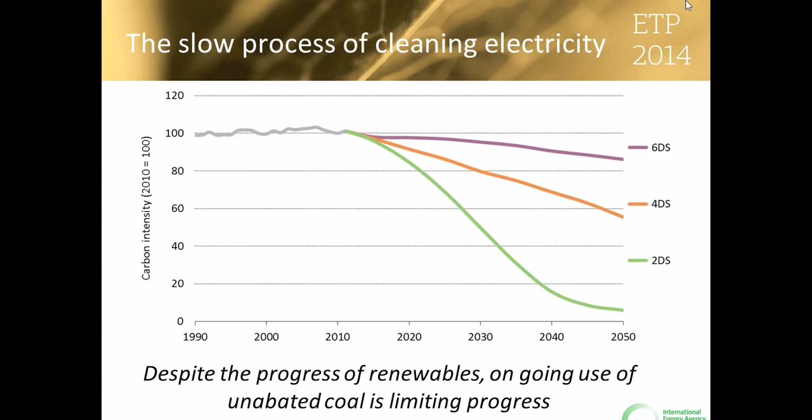So this introduces very different challenges. For emerging countries with high growth, we see that significant investments are needed, but therefore a significant opportunity to develop their system in a way that is sustainable. Contrast that with OECD member countries, we see low growth but aging infrastructure. So still more investment needed, but in a context of lower revenues for utilities. So this introduces some significant challenges. But what is clear across all regional electricity systems and energy systems is that the share of electricity is growing in importance.

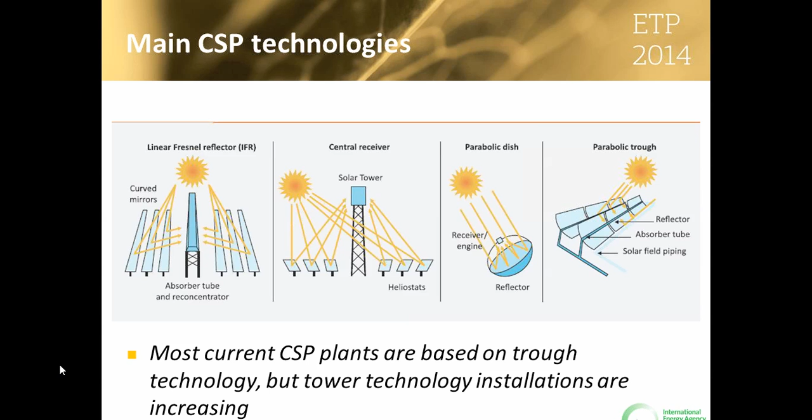Now you also have these solar thermal electricity technologies, the CSP technologies, which offer a different way of making electricity in places where you have very good direct normal irradiance, very good sunshine and clear skies, and then you have a bunch of technologies that allow you to generate electricity after you have collected the heat. And this is very important because it gives an opportunity to store the heat before turning it into electricity.

And this is a form of storage that is very good because first, it's very effective, there are very few losses, and second, it allows to increase the capacity factor of the conventional part of the plant. So at the end of the day, it does not increase the cost of electricity, but it can even reduce it a little bit. Most importantly, it increases its value in allowing to generate electricity on demand, and especially during peak times. In most countries, peak times can be in the afternoon, but they are more important after sunset.

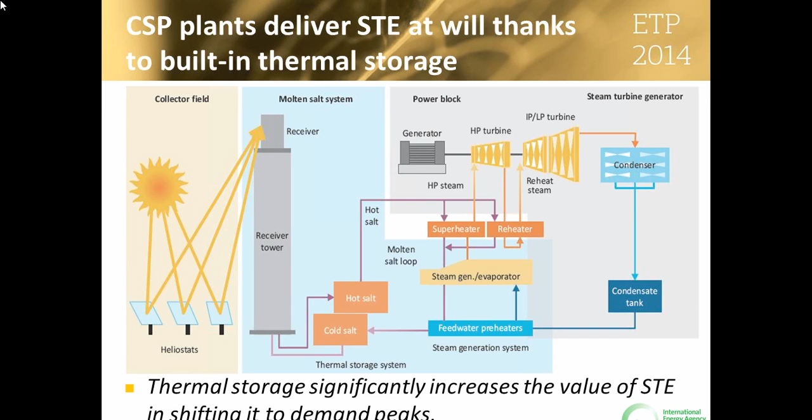And when you have a big population of PV systems in a country, then the net demand peaks after sunset, and therefore solar thermal electricity from CSP plants will be able to compensate and inject more electricity in the system at those times when the sun is not here.

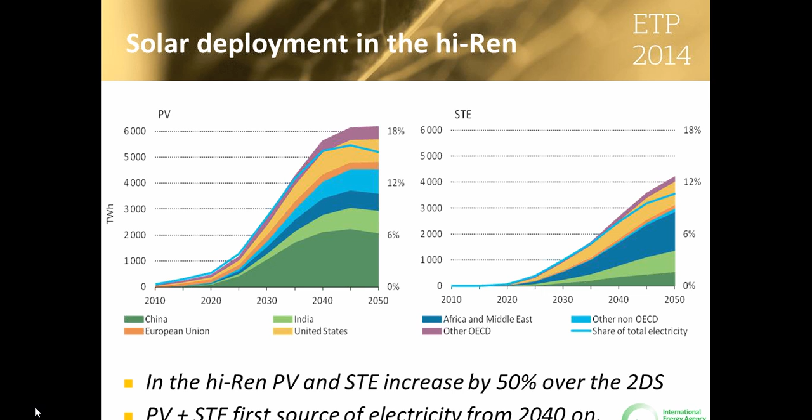PV system costs will be further cut, and we have reasonable hope that this process will continue. Of course, it will not be as fast as it had been in the last 6 years. This was historical, and now PV modules have roughly stabilized for some time. We expect that new technical improvements will further reduce the cost of modules. What we see is that the system costs continue to decrease when markets mature, because a large part of these costs are local, and when a local market matures, these costs are reduced by learning, scaling up, and density of projects. And this is true for both utility scale and rooftop PV.

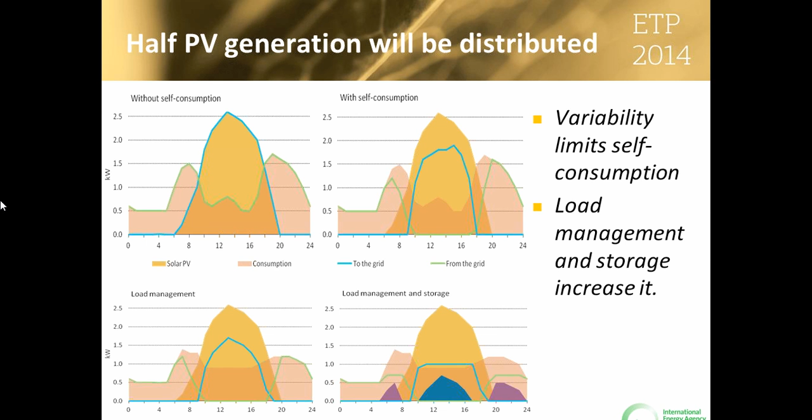CSP plants will also have their investment costs coming down. We see now an emergence of a bunch of new technologies, towers in particular, but also linear Fresnel are coming in, and we expect they have a great potential for reducing the cost of the technology in the coming years.

Variability has been mentioned by David. It's a true challenge, and I won't repeat what he has said about the various options to increase the flexibility of the systems. Just I want to signal that we have been publishing a full book on this, which is called The Power of Transformation. I invite you to look for it on the IEA website.

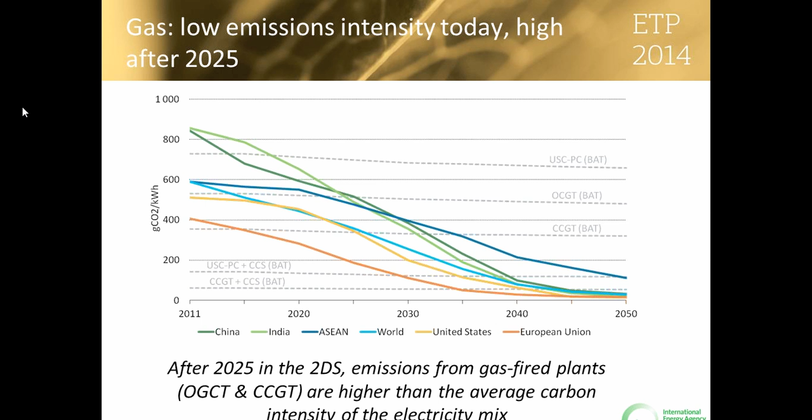And so you can see that for the most part, the emissions intensity of systems now and in the near future are above that of gas, so we can switch to gas to reduce emissions intensity of the system. But then as we move forward towards, say, 2030 or so, the emissions intensity of the average system starts to drop below gas. And so the switching from coal to gas or the addition of further gas can't actually help you reduce emissions intensity any further, and you need to start moving towards CCS. And as I said, this happens much sooner than I think many of us had thought in the 2DS, and that's around 2030 for most regions, and earlier in some.

And so that highlights the 2 key roles which Marcus mentioned for gas-fired generation in the 2DS. One is to reduce CO2 emissions from thermal generation by switching from coal to gas, and eventually with the addition of CCS. And the second is to support the integration of variable renewables by providing flexibility services. And I'm going to focus for the next few slides on the first topic, that's the fuel switching.

And so in the book, as was mentioned at the very beginning by Jean-François, we focus a lot on technologies. And so we've gone through a list of power generation technologies that use gas, and taken a look at them from the perspective of their maturity levels, their performance, and their capital cost, as well as other important attributes. And I'll be talking about those a little later. But what I'd like to focus on this slide are just 2 of the technologies that are important for baseload power generation currently, and what we think in the near future. And that's combined cycle gas turbines, CCGT, and combined cycle gas turbines with CCS.

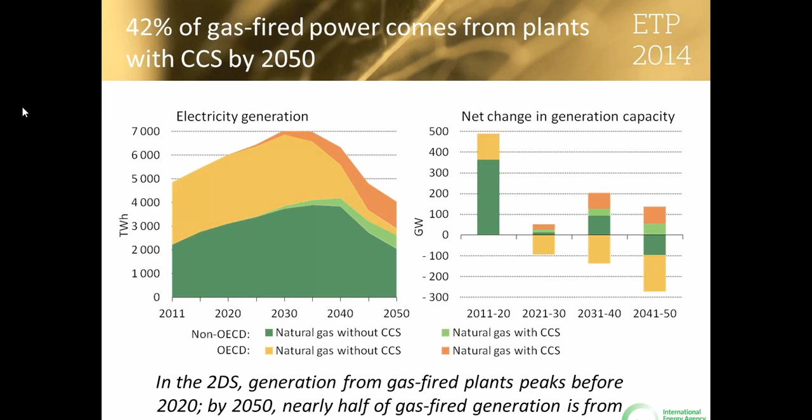And another interesting fact is that the capacity factors of the plants equipped with CCS are much higher than those not equipped with CCS, and that means that a lot of the unabated gas capacity built in the future would probably be more peaking units, really to supply some flexibility in the system.

So that takes a look at the first issue, the fuel switching from coal to gas, and now I'm going to spend a few minutes taking a look at the second issue, the idea that gas-fired generation can support integration of variable renewables by providing flexibility services. So we'll dive into that.

Again, looking at technologies, we looked at a variety of them on a number of different parameters, but one of the things I really would like to drill home is that it's not just about efficiency. It starts to become about other attributes of the technology. I'm going to talk about that more in a moment. But the three technologies I'd like to focus on now are combined cycle gas turbines, open cycle gas turbines, and internal combustion engines, or ICE.

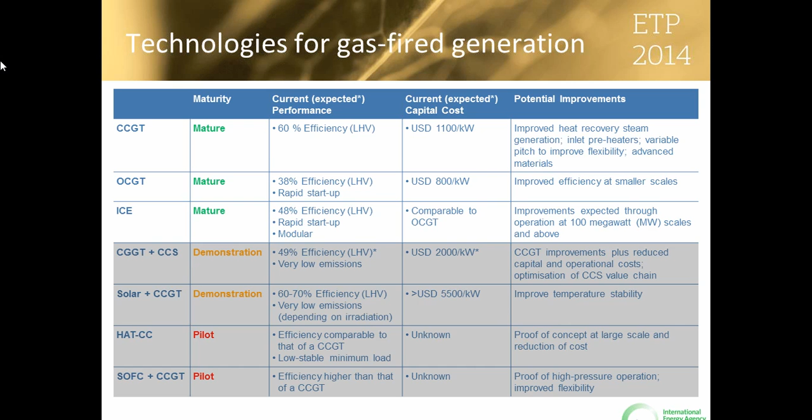And the benefits of these technologies are that while being efficient, they also have very rapid startup, rapid ramp rates, and other things that are very important for flexibility, as well as being relatively inexpensive. And when we say flexibility, what do we mean? Specifically, the extent to which an electricity system can adapt the pattern of generation and consumption in order to balance supply and demand. When you have a mismatch between supply and demand, you have variations in voltage and frequency, which can impact reliability of the system.

Historically, the variability of demand and the reliability of supply have driven the needs for flexibility. But as we move forward, as Cedric was mentioning, the integration of variable renewables will drive increased variability of supply and the need to take actions to maintain the reliability of that system. And the factors we look at for technologies to meet these flexibility needs are things like startup times, ramping capabilities, and turndown ratios, in addition to the more conventional metric of efficiency.

And so if we take a look at our comparison of ramp rates, turndown ratios, and startup times, we can see that in particular open cycle gas turbines and internal combustion engines, that's OCGT and ICE, have relatively high ramp rates, low minimum turndown ratios, and short startup times, all things we'd be looking for to support flexibility in the system.

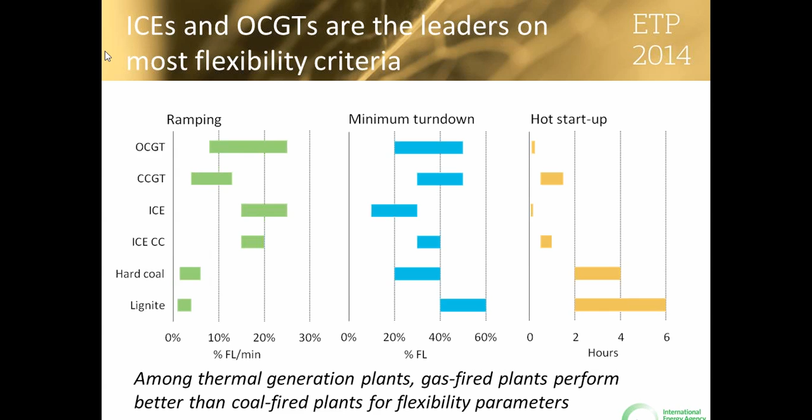However, it's hard to see how one would make an investment in a relatively expensive, capital-intensive technology when you have a lot of uncertainty about how it might be run. So in conclusion, I'm going to cover all the conclusions, I think, from the chapter, but I haven't talked about them all here, so I'll give you a snapshot, and I hope you'll go to the chapter to see more.

First, natural gas we see as a key transition fuel, both as part of the means to decarbonize power generation, but also to support the growth of variable renewables. We also feel that both coal and gas can provide for baseload and flexible power using existing technology.

However, both these technologies will be hit with increased operating and maintenance costs by ramping and shorter startups and more flexible operation. And at the same time, there's going to be more uncertainty in operating hours that makes investment decisions more challenging, and in general is going to be a challenge to high capex technologies.

So what we see are policies that regulate CO2 or price CO2 can help favor gas over coal and actually help with flexibility in some sense, and also a need to reward system benefits, as was mentioned in the previous presentation, in this case, for flexibility. And these sort of policies become critical to delivering the 2-degree scenario in the future.

So that wraps up what I'd like to say about the gas chapter, and I'll hand it back to Marcus. Thanks, Marcus. Thanks, Sean. That's a brilliant rundown of the chapter, I think.

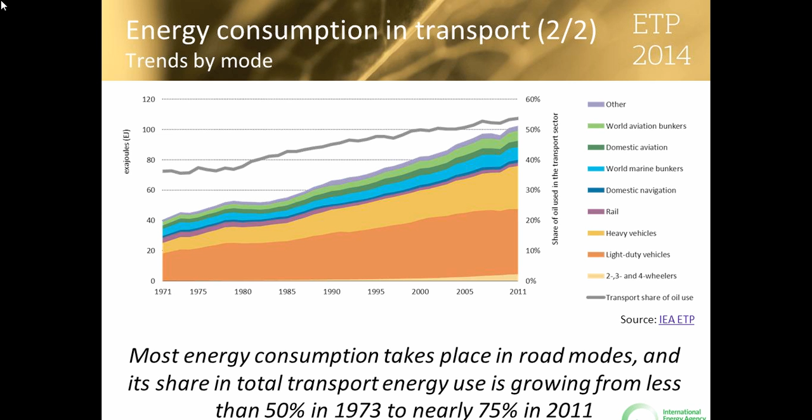If we elaborate on that and look by modes, you can see here from 1971 to the present, more or less, different modes in terms of energy consumption. And what you see is that the road sector dominates. And unfortunately, it seems that the most energy-intensive modes are the ones that are accounting for more and more energy consumption. So that includes such things as passenger cars, light-duty vehicles, and of course aviation. What you see here is at the bottom, the most energy consumption takes place as road, as I mentioned, and the total energy use grows from less than 50%, just half in 73, to almost 3/4 today.

And here I'll make the distinction between a vehicle that's electric and a vehicle that's electrified. So for example, an airplane could today be hybrid electric, or it could be more electrified, onboard electrification, or even ships. That would be different from it being electric, so actually powered by electricity. That's the focus of this chapter here.

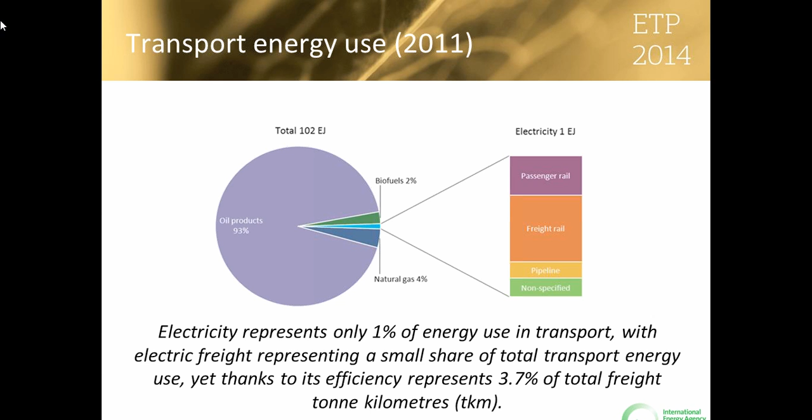So if we look today, what's the situation today? What we see is that electricity use represents less than 1% of the energy use in transport. Most of that is going to rail, though thanks to the efficiency of electric freight, 3.7% of total freight ton kilometers are represented through electric freight. And if you look at progress over the last couple of years, rail electrification is moving forward across all 5 metrics here: infrastructure, tractive stock, cars, TKM for freight, passenger kilometers, and energy consumption. There's been more relative progress for passenger rail than for freight rail.

So if that's the case, if we are electrifying highways and putting in catenary lines, we may not have to be talking about 100%, but maybe you can get economies of scale, quite a bang for your buck for the first percent or two that you may want to electrify. Of course, this has equal implications for hydrogen, natural gas, you name it.

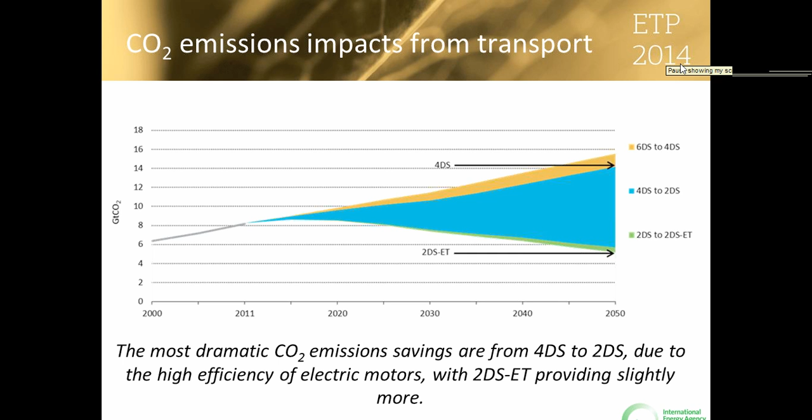So let's move on now to one of those sources of flexibility that Dave mentioned in his introduction, namely storage. Sometimes storage is portrayed as one of those potential solutions that could dramatically change the game. If only we could store electricity, some people argue, a lot of the problems we see around, for example, solar and wind and their ability to penetrate the market much more quickly would be solved. Is that true or not?

Let's hear it from Steve Heinen, who I think is joining us from Dublin, and Luis Munuera, two of the authors of the chapter on storage in ETP 2014. Good afternoon, everyone. I'm Luis Munuera. I'm an energy analyst here within the ETP division. Myself and my colleague Steve Heinen are going to present specifically on the role of storage in future electricity systems.

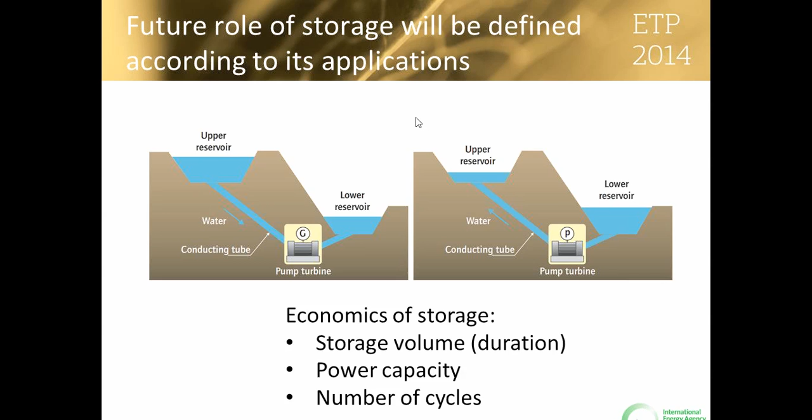And finally, the location is really important here, for example, for some technologies like pumped hydro or perhaps compressed air energy storage, which is mainly done in underground caves. These technologies can be very constrained by their location. So I will now pass on to my colleague Steve Heinen to continue the presentation.

Thank you, Luis. One of the things we've been stressing is to really take an application perspective, because as Luis illustrated with the example of pumped hydro storage, this technology was built for a reason. The reason was that nuclear was basically a baseload technology running flat through the day, and the energy requirements during the night, for example, were lower than the nuclear energy produced. So there was a normal market opportunity to store cheap nuclear energy during night and discharge it at peak prices during day. So arbitrage opportunities have driven most of the storage deployment over the last 40 years.

But what is obviously clear today is that there might be a second wave of storage on the horizon. This is driven by a few trends in the electricity system. First of all, we have penetration of variable renewables, but you also have end-use electrification. So there might be opportunities to provide operations support, but also system planning applications from storage. The drivers are, though, very system specific and obviously very complex. These depend on market, regulatory, but also technology development, and eventually local geographic conditions.

So that means that it's very difficult to give a general assessment of storage. Though we try to come up with a certain categorization to explain to you a little bit more that storage is not just a single technology, but is composed of a multitude of technologies.

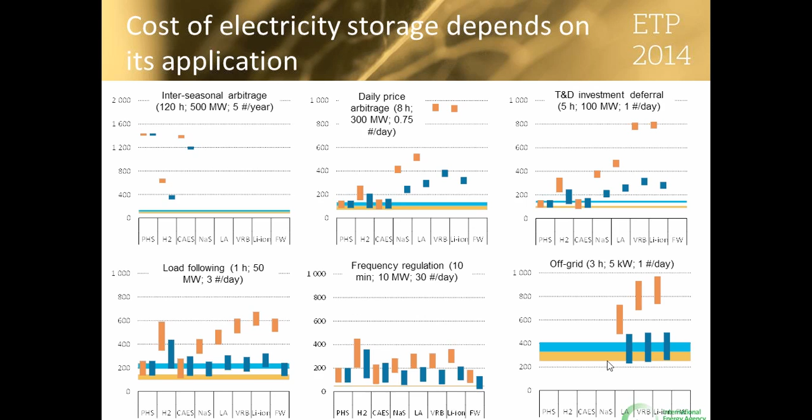And obviously I should not forget here to mention, we see this already happening at very, very small scale with, for example, advanced electric lighting devices in rural areas that have been deployed largely. Those are low-cost applications, and their electricity has already shown its potential to improve quality of life by something as simple as lighting.

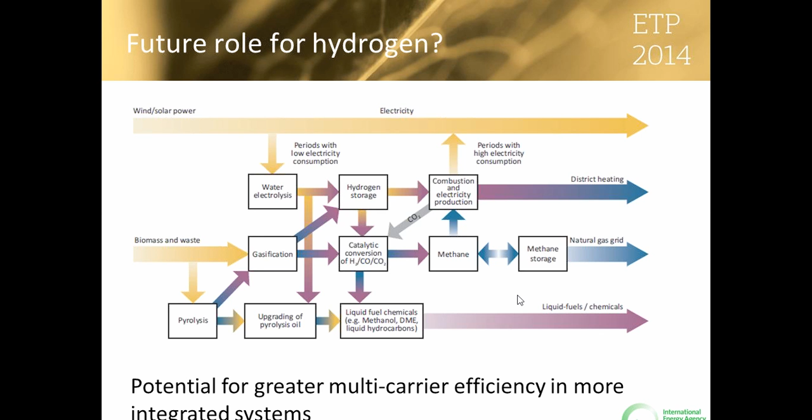So just to wrap up, we really believe that storage is important and we should continue R&D efforts and even deployment and demonstration efforts in storage. But we should not forget that storage is not a game changer. We have other options in the energy system that enable us to integrate large shares of variable renewables. Cedric Philibert alluded before to a recent publication from the IEA, where we show best practice examples on how to integrate variable renewables.

It's also important that storage is very system specific. So it will depend on the specific loads. If you have more of a peak load profile, there might be more options for storage than if you have a relatively flat profile. It's also important to look at the flexibility of the thermal stack. If you have an inflexible thermal power plant fleet, then there are more options for storage. And finally, which applications are needed for the system. So it's very important to make an assessment of local conditions.

A conclusion for that is that in terms of what policymakers should support, we really believe in application-based technology support. So let's assume you're a country and you see that an application like load following is the most important one for your country. Then you should have an open innovation model where you support innovation for load following rather than specifically pushing one technology, which might lead you to suboptimal results.

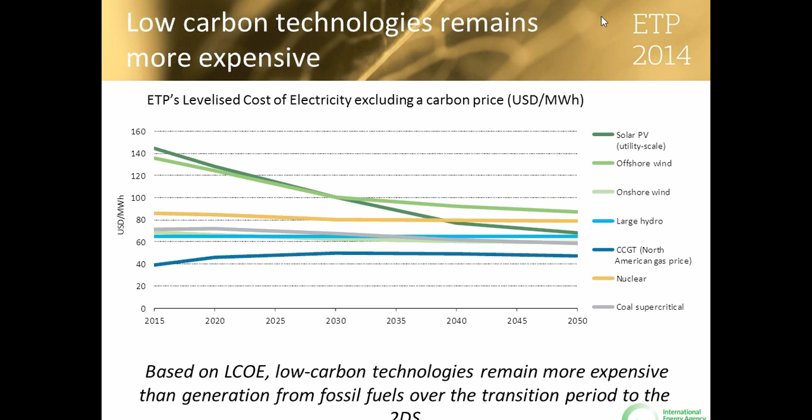And risk allocation needs to be more important. So these are the highlights from this chapter. And let me be clear, we're not saying that a carbon price isn't important, but we do need to consider the fact that that hasn't been as successful in the short term as we had hoped. So what we see is that low-carbon technologies remain more expensive, especially in this transition period, but not only more expensive on the levelized cost of electricity, but also more capital intensive. And so this introduces some challenges for investing.

And what this does is it increases their exposure to market price. We see that right now wholesale electricity prices are largely influenced by the price of the fuels, whether that's natural gas or coal. With low capital costs and high fuel costs, this is logical for these technologies. But when you look at many low-carbon technologies, this doesn't fit. They don't fit the same model. So it changes both the economics and the risks for the given investments.

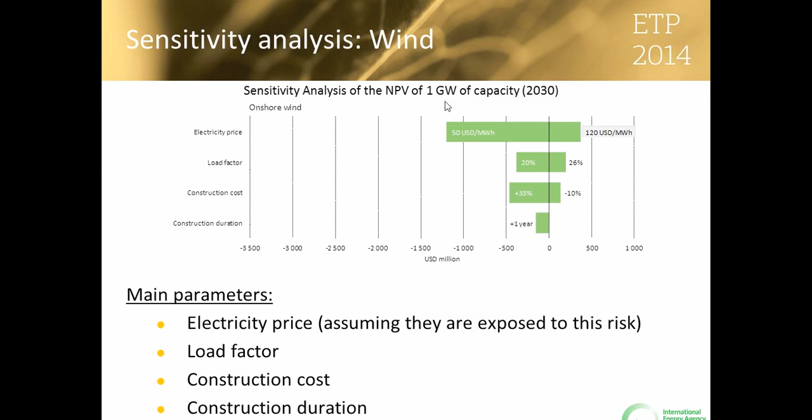So we looked at several technologies. In this case, on the screen, you have onshore wind. And what you see is that, for instance, for the construction duration, there's quite a high level of certainty here. It's well known and well managed. Of course, costs can vary, and the actual cost of the deployment has a huge impact on the net present value. But most important is the electricity price risk. And you see, looking at 1 gigawatt of capacity, as we vary it from about $50 per megawatt hour to 120, it dramatically changes the net present value calculation.

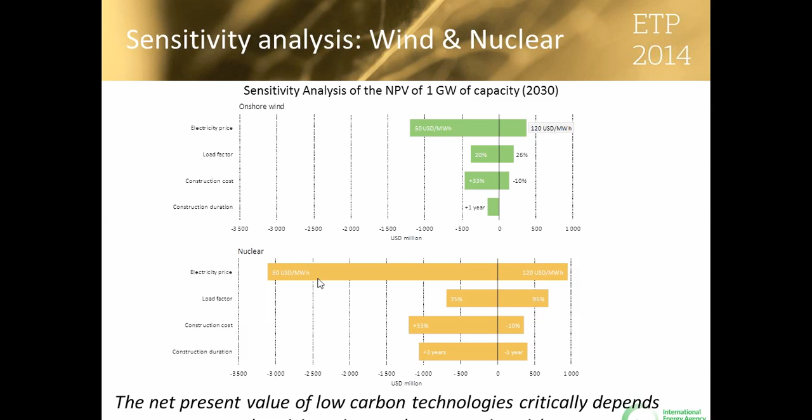And we see, if we compare that now to nuclear, putting nuclear at the bottom, you see that the large capital investments that are required for nuclear power means that the electricity price risk is huge. But also, as we've seen in the development of nuclear power, the duration of construction combined with the high upfront capital costs means that if you have an extension of 3 years in the construction of the plant, it has a huge impact on the net present value. So therefore, raising the risks for investment in this technology.

So we really have two ways to look at this. One is improving the expected net present value. So increasing essentially the cost of capital, so that even though the risks appear and they're large and spread out, the return is high enough for investors to accept the risk. Or we can, in number two, try to make the risks lower and therefore decrease the cost of capital and make it easier to invest in these technologies. And there are a number of schemes that can be used to do that.

But what is interesting is that where the risks are held, whether it's the ratepayer or society in general that holds those risks, or the investors, depends on the different mechanisms. So if you just contrast a fully regulated market, the ratepayer incurs the entire risk. As you try the different mechanisms, you push more risk towards the investor.

And the best way to manage risk, or I guess handle risk, is to make the risk fall to the stakeholder who can best manage it. So it's very important for the policy options; sometimes the government is the best one to manage that. Sometimes it's the construction company or the investor. So from that perspective, it's very important to do this transparently and shift it to those who can best manage it.

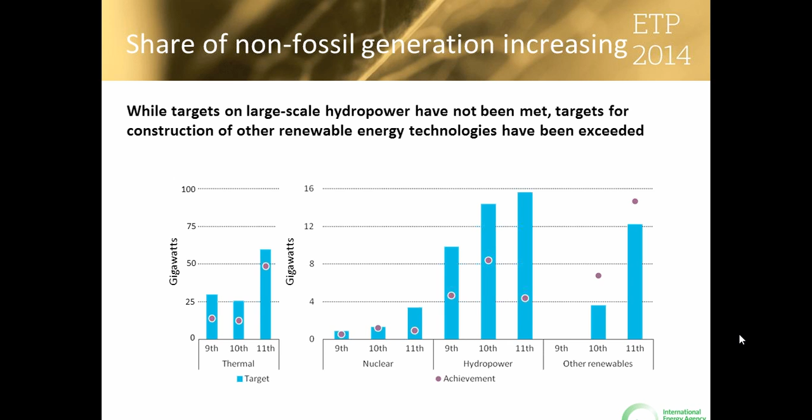Well, all future scenarios, whether it's the 4DS or the 2DS, require a heavy increase in power sector infrastructure investment. The weighted average cost of capital in India is currently around 15%. For coal, at a cost of capital above around 12%, investment in less efficient, less capital intensive subcritical plant is more cost effective. So we continue to see construction of subcritical coal plant in India. And while investment is not the only factor influencing infrastructure construction, it weighs heavily on the choice of technology.

But I mentioned that India is more cost-effective to build subcritical plant at the moment. Well, from the 13th five-year plan, beginning in April 2017, it will introduce its policy preventing the construction of further subcritical plants, so that plants from April 2017 will be supercritical.

And the cost of capital is also crucial for renewables. At a US-European cost of capital, renewables greatly increase in competitiveness. And in many areas, wind at grid parity.